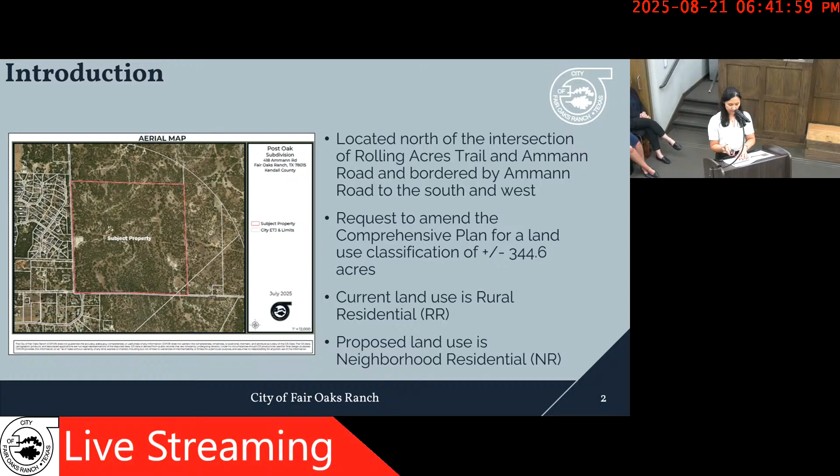In December 2024, staff received applications from Brown and McDonald PLLC on behalf of the property owner BRMK Boerne Ranch LLC for annexation, future land use map amendment, and zoning. On May 20th, 2025, an amendment development agreement providing for 278 single-family residential units with 1 acre minimum lots was approved by the City Council.

On June 19th, 2025, public hearings were conducted for the annexation and PID, Public Improvement District. On July 3rd, 2025, Council approved the annexation of the subject property. Then earlier this month, on August 7th, 2025, the City Council approved the development agreement amendment to reflect 227 single-family residential units. On August 14th, 2025, the Planning and Zoning Commission recommended approval to City Council to amend the FLUM classification. Tonight, August 21st, is a City Council public hearing and consideration of the FLUM amendment to align with the development agreement.

What is the future land use map classification? The future land use map, or FLUM, is contained in the comprehensive plan, which shows the long-term vision for land use and zoning throughout the city. The comprehensive plan was adopted in 2018. It is a living document and is intended to change and adapt with time and circumstance. Local Government Code 213 authorizes municipalities to amend the comprehensive plan, including the FLUM, to guide long-range development. Past amendments include the Arbors and Oak Bend Estates. The process includes public hearings and P&Z recommendation to City Council with readings to follow.

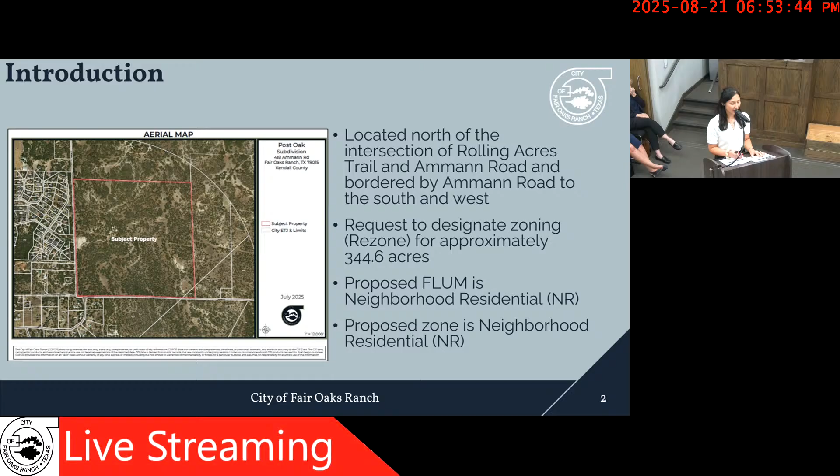Good evening again. My name is Jessica Relucio, City Planner for the City of Fair Oaks Ranch. And this public hearing is for a proposed zoning designation for the Post Oak subdivision to align with the future land use map classification. The site is the same project that was just covered in the future land use map amendment public hearing. It's 344.6 acres. And the zoning is proposed to be neighborhood residential to align with the FLUM neighborhood residential.

What is zoning? Following the comprehensive plan, the zoning regulations became effective, which support the goals of the future development and land uses through zoning districts, such as residential, commercial, and logistics. In other words, zoning is a component of the future land use map, and both must align with each other. Past rezones include Oak Bend Estates and the Arbors, and the process requires public hearings and P&Z recommendation to City Council.

The appropriate zoning district for the area is neighborhood residential. Here, minimum lot size of 1 acre. Once more, the zoning designation meets the development agreement and the FLUM. Here's a zoning map showing that it's currently unclassified or undesignated, and here is the proposed neighborhood residential zoning district.

Similarly to the FLUM amendment criteria to review within the comprehensive plan, the proposed zoning shall be consistent with the suburban and rustic character, greenery, trees, trails, open spaces, preserving water resources, natural resources, and wildlife, and ensuring high-quality construction and infrastructure. Additional criteria in the UDC mirror the FLUM with the exception of the compatibility and conformance of nearby uses, and the property affected by the zone change is suitable for the proposed uses as well.

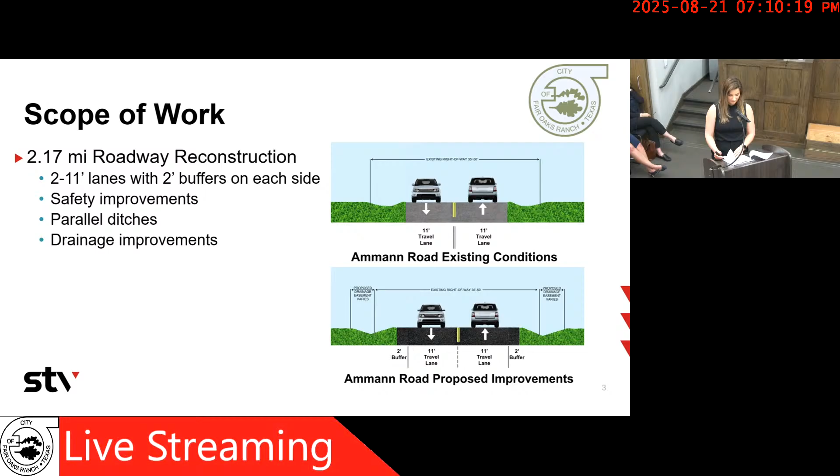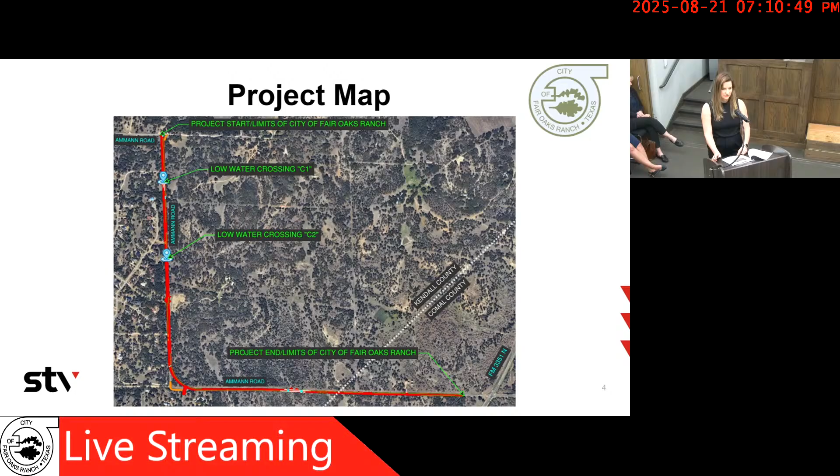Here you see a project map of Ammann Road. On the top left corner, that's where the project begins. That is the west end of the city limits. And on the bottom right, this is where the project will end, and that is the east end of the city limits. There are 2 blue pins on this alignment. Those are the locations for the low water crossings that we have identified. And I will let Joseph Sosa take it from here to go over those options.

Thank you. So our first low water crossing, the existing culvert's one 18-inch RCP. And as you can tell, we have some flooding issues. And the existing level of service is below the 2-year. So just to put that into context, the 2-year is about 4 inches in 24 hours.

So we proposed 3 options to meet different levels of service. The first one is a 5-year. That's going to be the more frequent, less rainfall, around 5.5 inches in 24 hours. And all the way on the other side is the 25-year, which is just under 9 inches in 24 hours. So we have 3 options there and the associated costs with those.

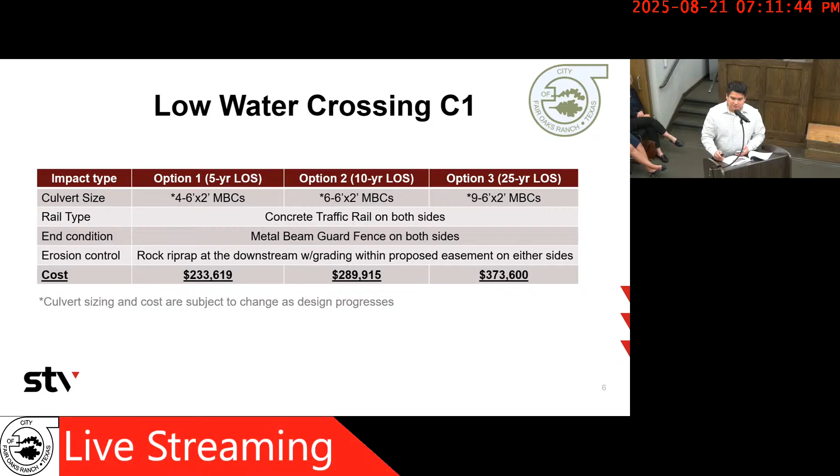So we have the proposed crossings. The next 3 slides are going to be the 3 that we just looked at, and these are the proposed grading improvements that we're going to need. On the downstream side, we have proposed riprap to reduce erosion. As you can tell, the next one is the 10-year, and that's where we get more culverts and a wider apron for the riprap down here. And then finally, the 25-year.

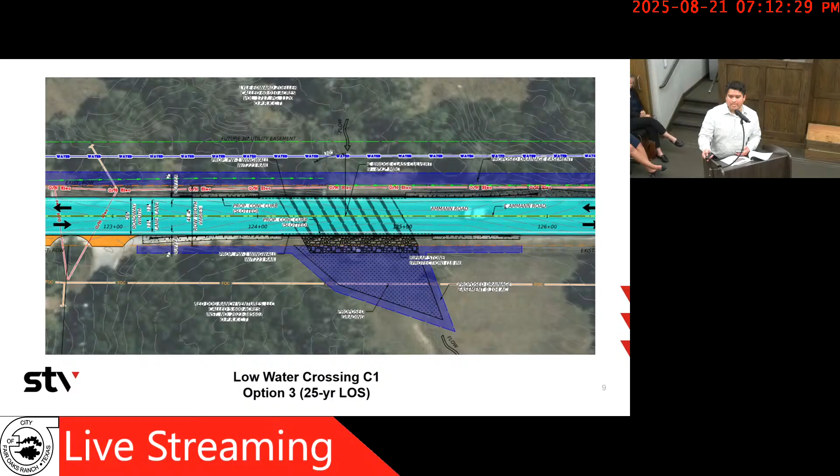And then the next low water crossing, just about 850 feet north of Ranch Pass. Again, we have one existing 18-inch RCP, and the same thing with this, below a 2-year level of service. Because of the depth, we're only able to insert 18 inches instead of raising the culvert. So we have various options that meet the 5, 10, and 25 level of service.

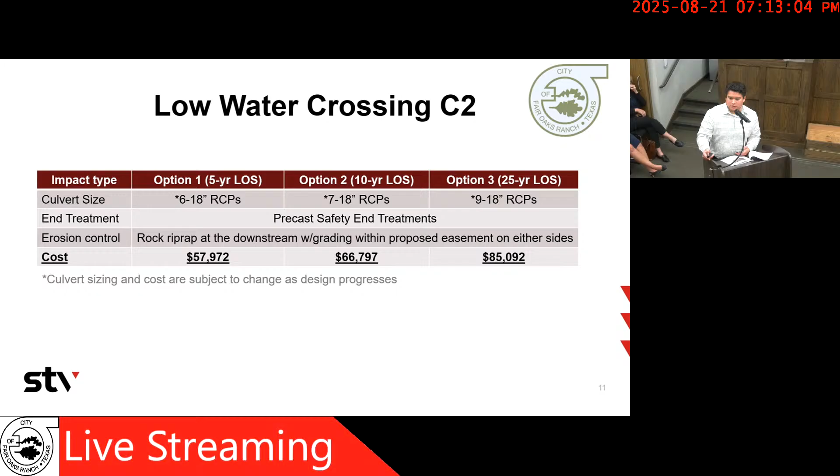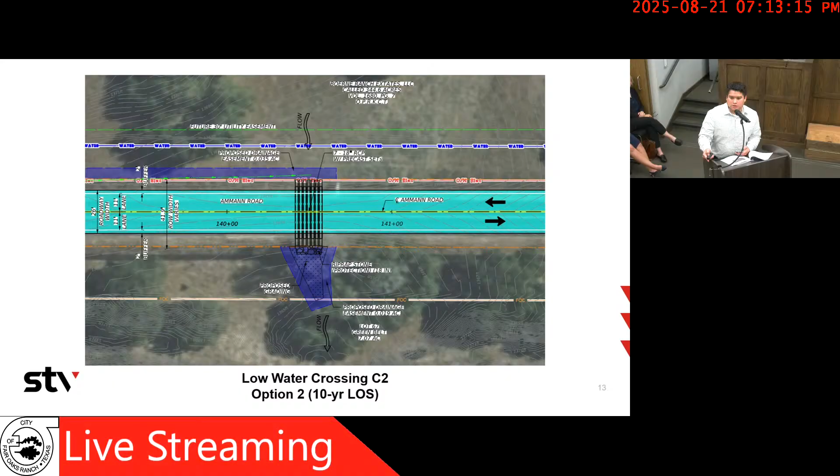And again, we have the proposed grading and the riprap to reduce erosion. And then finally, our 25-year.

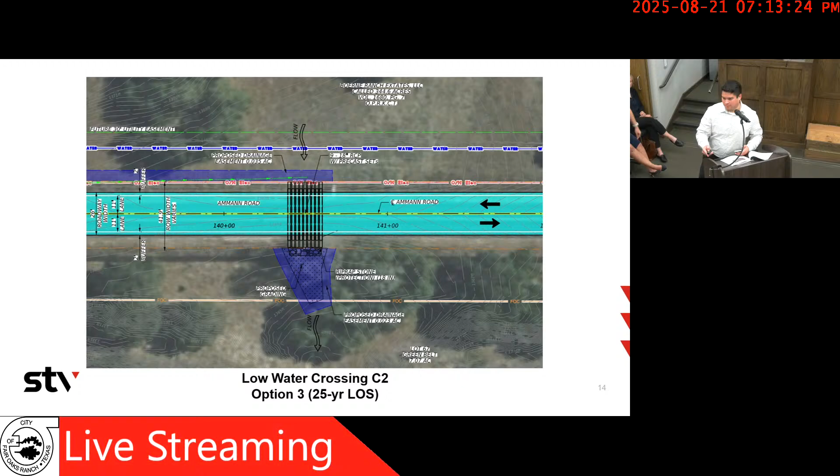Thank you. Thank you, Joseph.

Yes, sorry. Have any of these been affected by flooding so far or to date? Existing. We haven't heard directly from the property owners, but from what we've seen, I think some of them have been affected. Mostly on the low water crossings 1 and 2, I can potentially see that happening, just because of how small those existing culverts are. Thank you. No problem.

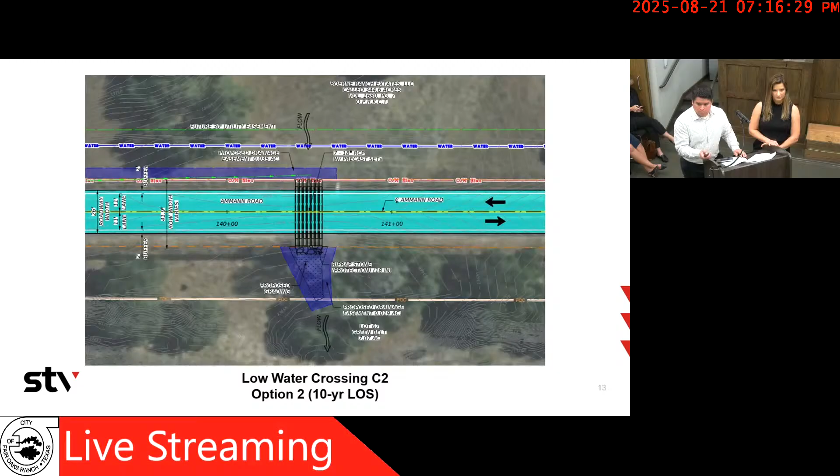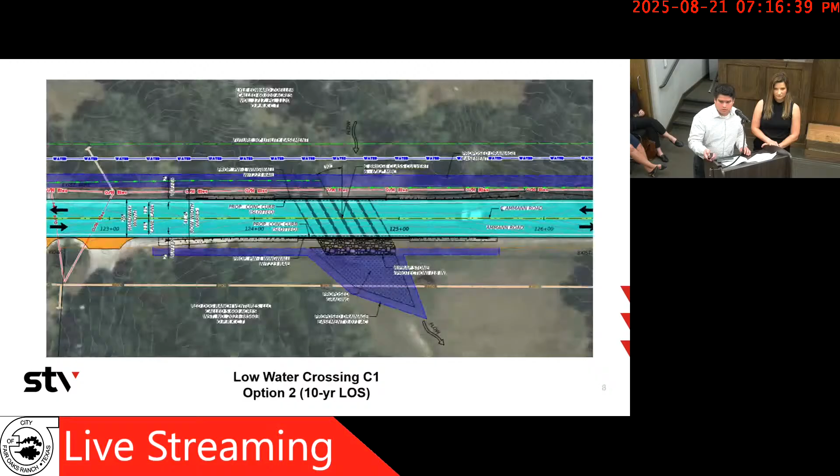Any more questions on this slide? Can you go over that again for me about the existing development? I just need you to simplify it for me a little bit. Is what you're proposing going to affect what's being proposed on the downward side? Or are you going to be able to divert the water? Is this project going to divert the water away from that?

No, our culverts are only designed to convey existing flow. So here's the proposed tract that was just mentioned. This culvert is currently only taking existing conditions here, but we will incorporate the future development into that design. But to answer your question directly, we're not increasing the flow on the downstream side here. We're just conveying more flow so it would not flood the road. I got you. Okay, thank you.

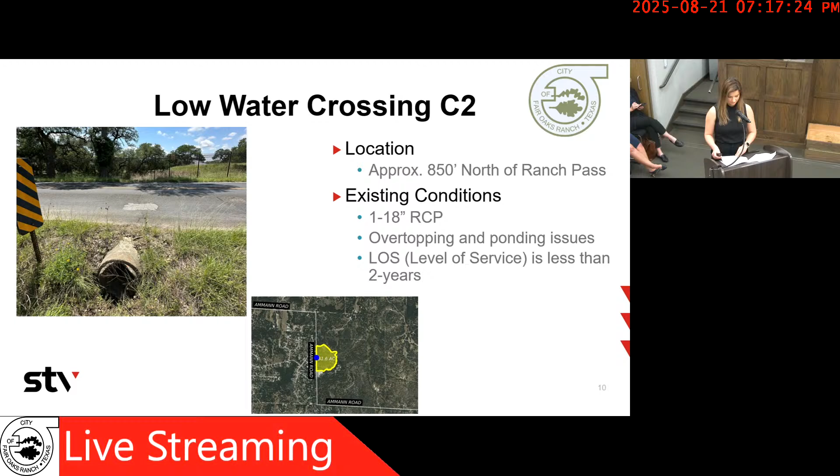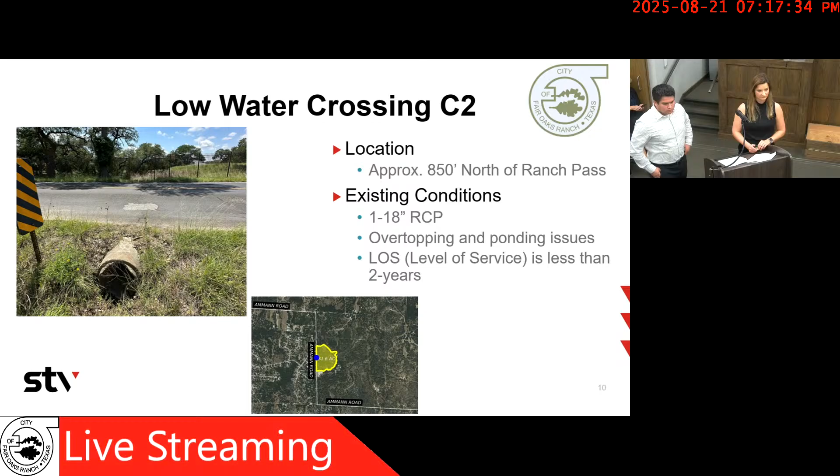So, just to be clear, I believe the question was about a development coming in which could increase impervious cover towards that area, and that's what y'all are gonna take a look at to ensure that it can handle? Well, we are not taking it from that perspective. I think the engineers for the development can maybe speak to the impact of the development on the neighboring properties, if they're here. Okay. Yeah, if you want. Thanks, Ben.

I just want to make sure we're all talking and that we have the right information. Ben Bunker with Bitterblue Development, and we have Matt Geistway with PD. He's our engineer on the project. We are on the upstream side of this culvert, culvert number 2. Currently, we have planned to do a detention basin, so we would not be increasing. Our previous engineer also designed the development across the street from us, on the downstream side, and he told us it was designed for ultimate development. Is that the Stone Creek Ranch? Correct.

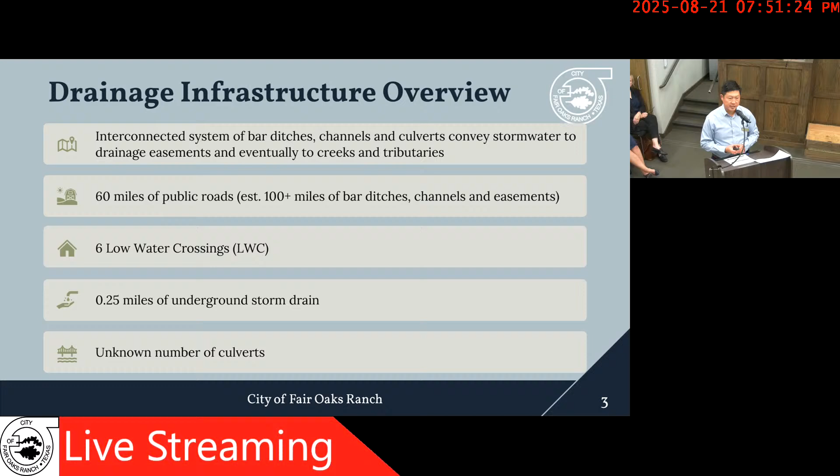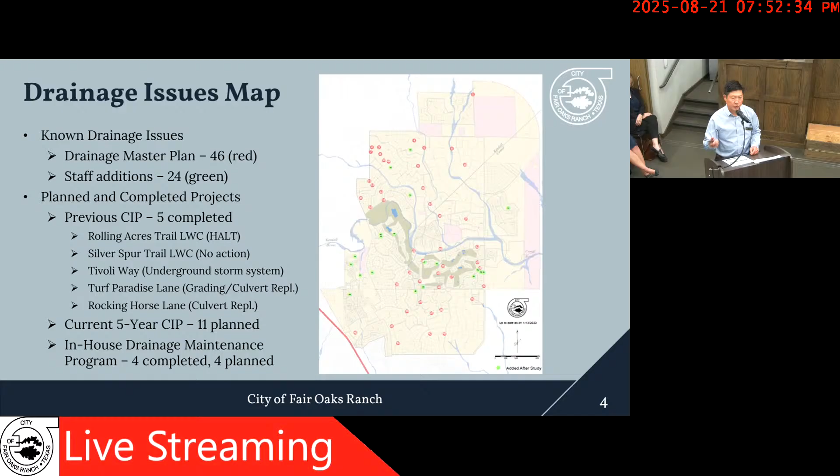And over on Rocking Horse Lane where we also replaced the culverts. Under our current 5-year drainage CIP, we have 11 projects planned with several in design. As part of our in-house drainage maintenance program, staff has completed 4 projects with 4 more planned in the next few years, which I'll cover in the next couple slides.

So over the past year, we've been working with Ernie Martinez, our GIS specialist, to create a drainage infrastructure map using ArcGIS. This map is composed of over 1,000 different segments representing the ditches, culverts, easements, and other drainage infrastructure in our city.

Those data fields include the location, the type, whether it's an earthen ditch, a channel, or a culvert, the material, whether it's a corrugated metal pipe, reinforced concrete pipe, or other material, the size, and the grade. Grade is very important, especially when doing maintenance in flat areas, because you need to know the flow pattern, what's upstream and what's downstream when grading.

The condition - I'll cover more on condition on the next slide - but we also plan to color code the condition. We'll record past inspection dates, maintenance history, and attach any documents to the map and those segments, including any photos or as-builts.

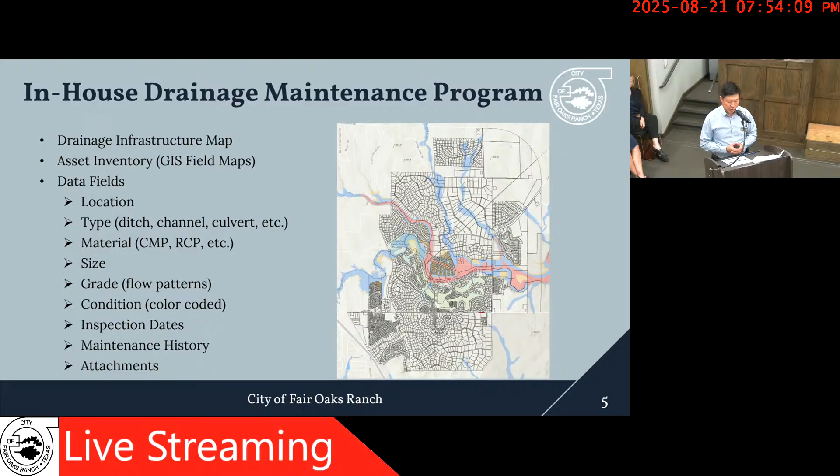I mentioned color coding, so each segment will be color coded based on condition following an assessment. Green will represent good, orange will represent fair, red will represent poor, and gray will represent unknown or to be determined. At this time, it's kind of hard to see, but there are just a few small orange and red segments up in the Rolling Acres Trail area.

That's where we did our test run with this drainage infrastructure map. But the vast majority of the segments, I'd say over 99%, are still gray, which is unknown or to be determined.

The results from this will be used to prioritize our in-house maintenance efforts. It will also support our annual budgeting, and it will help inform future drainage CIP projects. This process is very similar to the city's annual street maintenance program.

All of our public roads are color-coded based on condition using PCI and OCI data, and that's what's used to determine which streets and the type of treatment used on those streets each year in order to maximize the lifespan of our road infrastructure.

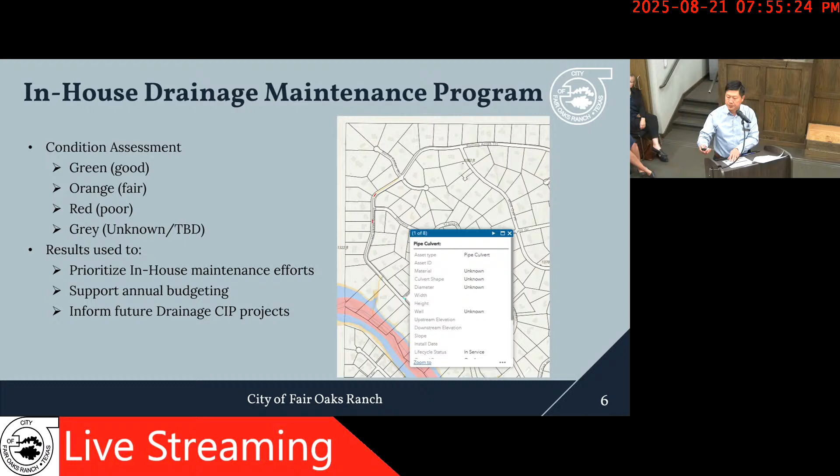The few other planned projects are also on the northwest side of the city. They include work on Sunland, Scarteen, and Wembley, but this is subject to change depending on the outcome of our asset inventory, condition assessment, and prioritization efforts.